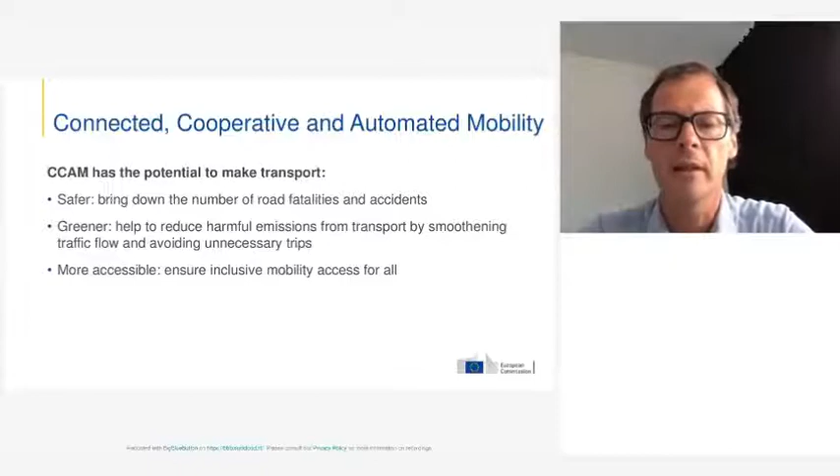At the European Commission, we have a comprehensive approach to support the development and deployment of connected and automated vehicles in Europe, where we think we need to develop a legal framework, take into consideration societal and ethical aspects, and invest in research and innovation. We do this because we think that CCAM - connected, cooperative and automated mobility - has the potential to make transport safer, greener and more accessible.

However, there are several challenges that need to be addressed, and they go beyond the key technologies, although that's a very important aspect. The right legal framework has to be set up and adopted at member state and EU level. Also, connected and automated vehicles will need to be integrated into the broader transport system and interact with other forms of mobility. In other words, we don't think a connected and automated vehicle is a silver bullet to solve all your mobility problems. Finally, acceptance and trust in this CCAM technology by users and society has to be nurtured every step of the way. Without this, you can have technology that works and a legal framework that allows it, but if people don't want to use it, you will not get the benefits.

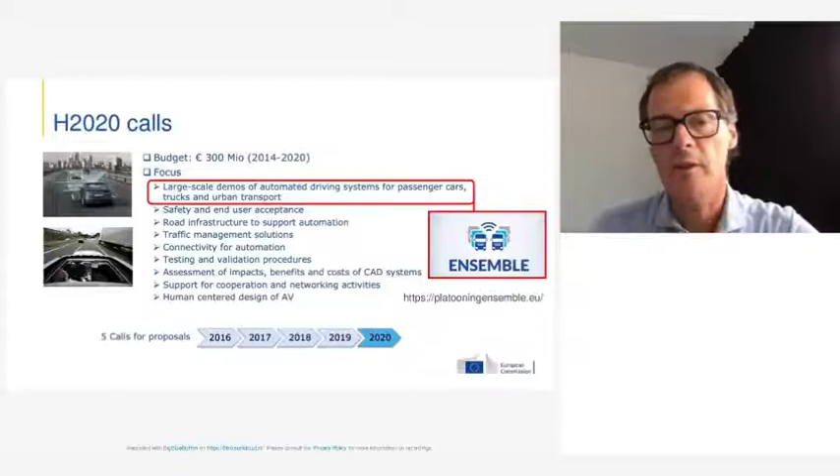As you may know, we are currently in the Horizon 2020 framework. It's a 7-year framework, and we funded a lot of calls. The budget is approximately 300 million euro, and we are now at the final stage.

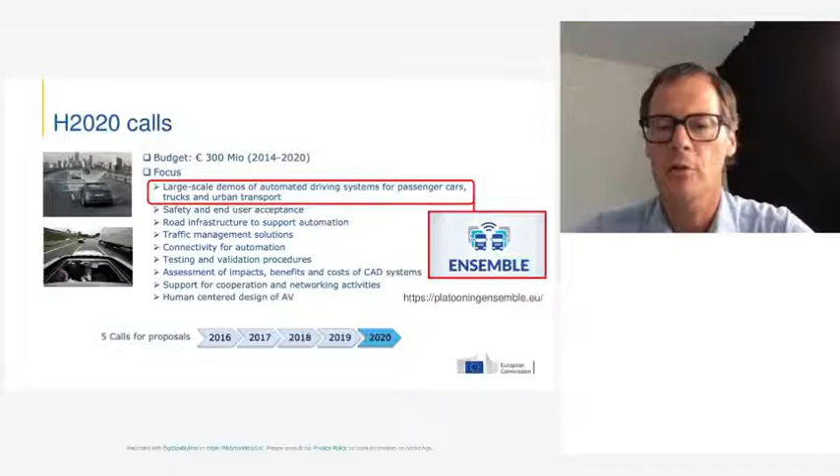We had to focus on quite a lot of different elements of CCAM. I put in red the large-scale demos of automated driving systems for passenger cars, trucks, and urban transport, as I think they are quite relevant to this webinar, and especially Ensemble, since it is about multi-brand platooning. You can find all the information about the ongoing Ensemble project at the URL below the symbol.

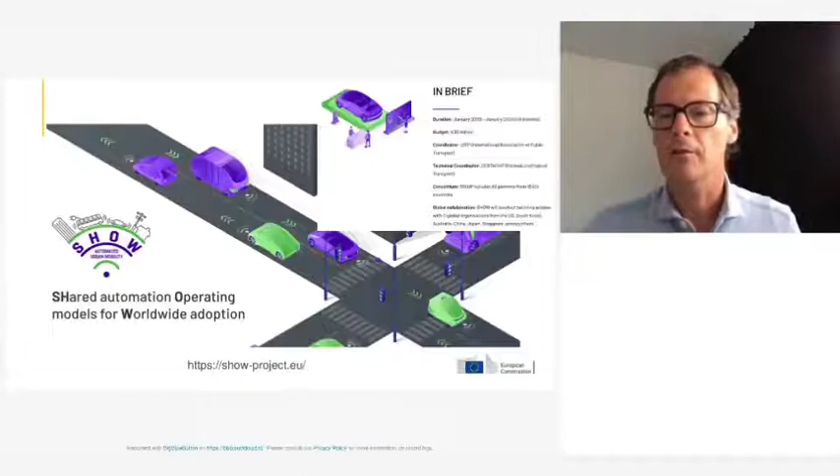Two of the latest projects that have just started are SHOW and HADRIAN. SHOW is about developing and testing shared, connected, and cooperative automated vehicle fleets in urban areas. So in a sense, that's also quite relevant to the STAD project. I think it's a quite large consortium with 69 partners, and international cooperation is foreseen. You can find all the information on this project at this URL, and it will last for the next 4 years.

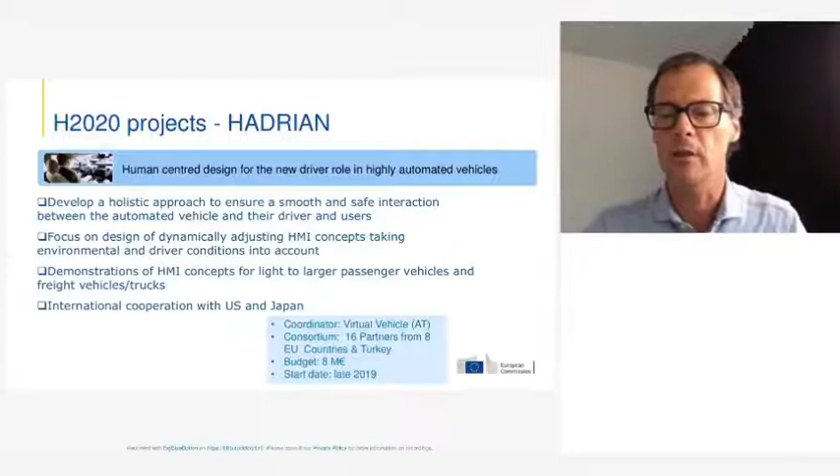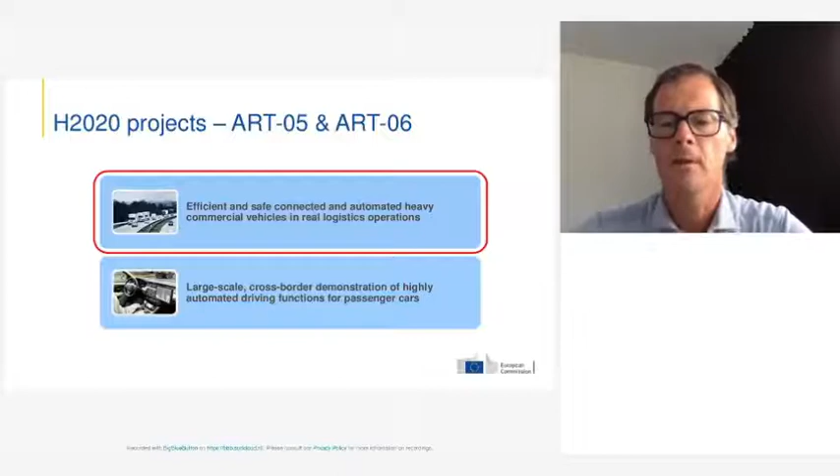I would also like to announce that the final 2 automated road transport projects in this framework are currently in the granting process. Sorry that I cannot announce them today, but one of them, ART-05, is on efficient and safe connected and automated heavy commercial vehicles in real logistics operations, and that includes truck platooning as well. So that's quite relevant for this webinar.

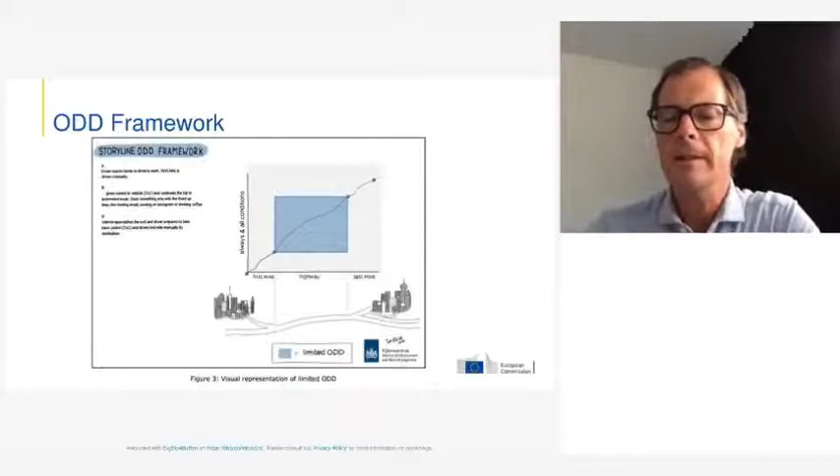Then a few words on the operational design domain framework. This is something that I did in my time with Rijkswaterstaat, where we try to envision the operational design domain. This is the area or the set of conditions under which automation is functioning. In theory, you can depict it like this, but in practice it's a bit more complicated because due to a lot of external factors that cannot always be controlled, the operational design domain will have some gaps.

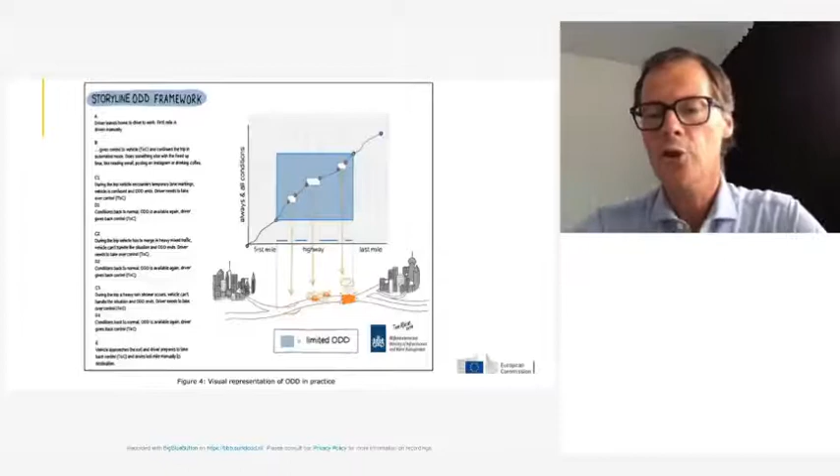This is usually because of infrastructural shortcomings or complications. It can be other traffic. It can also be adverse weather conditions. And I think that one of the joint tasks that we have with industry, policymakers, and academia is to try and optimize the area of the operational design domain.

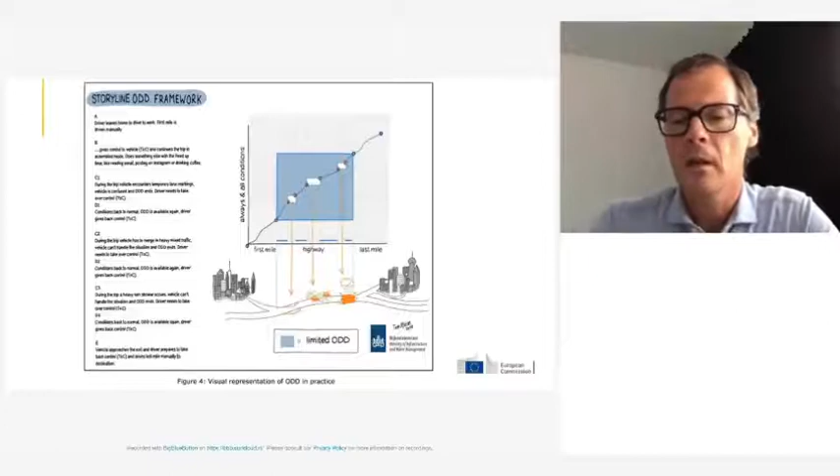In practice, what we try to do at the Commission is to position a lot of the projects so that they can deal with several of those challenges. As you can see here, there were a number of projects looking at the relationship between automated driving and infrastructure, such as Coexist, Transaid, Inframix, and Maven.

Here you can see that quite a lot of projects are related to one of the reasons for gaps appearing in the operational design domain. Of course, trying to control the weather is a bit more complicated. That is something we will have to deal with for a long time. On the left, I put several large-scale demonstrations.

L3 Pilot is basically dealing with passenger vehicles, Ensemble with freight vehicles, and Show with public transport solutions. We think that it's really important to try and find solutions based on actual practice. When you take your concepts to the roads, that's where you will see the complications, and you need to go back to the drawing board and try to improve and improve. So we think that this iterative process really is valuable.

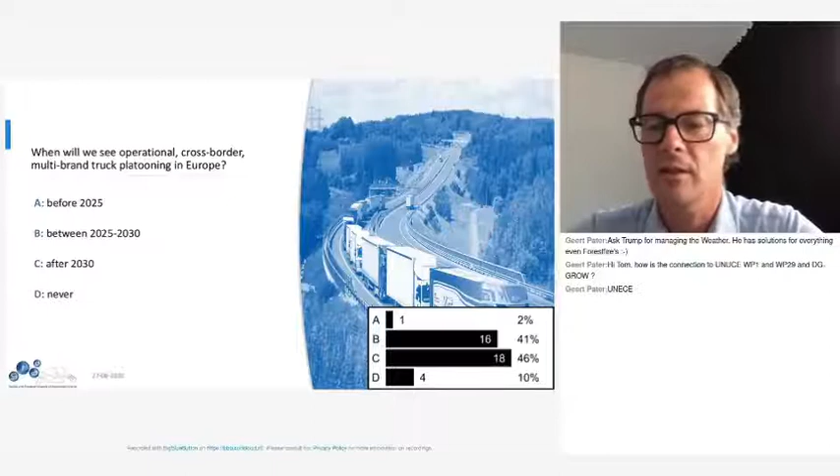I see that we have a lot of smart people in the audience, meaning that we are neither too optimistic or too negative. So most of the options are around B and C. I will publish them right here. Yeah, we may be quite optimistic because cross-border multi-brand platooning is not easy, but it would be good if we can see it within the next 5 to 10 years. Let's see. There's only one way to find out, and that's in practice.

Okay, now we go on with the program. I will introduce the other two speakers briefly.

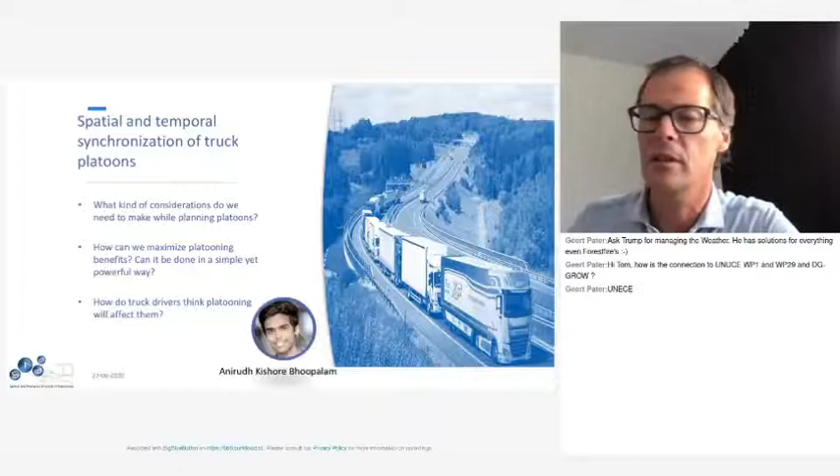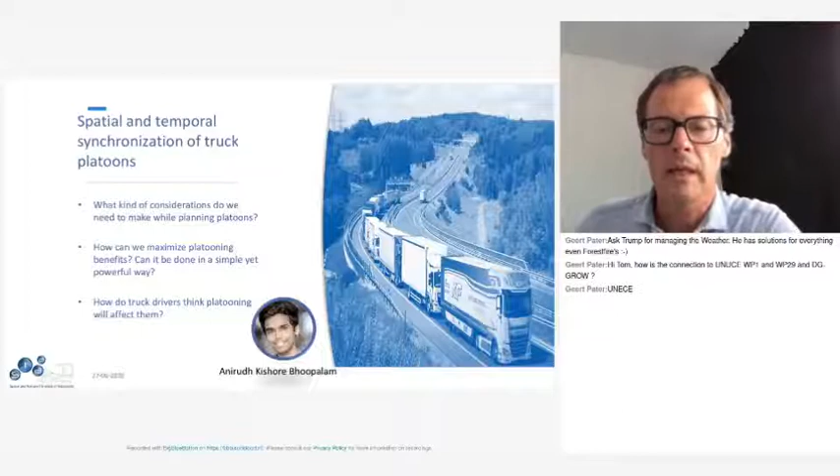The first speaker is Anirudh Kishore Bhoopalam, and he is a PhD candidate at the Rotterdam School of Management. His research interests lie in the application of operations research methods and quantitative models to transportation systems. He currently does this as part of his PhD in the context of truck platooning. He began his PhD just after finishing his master's in transport, infrastructure, and logistics at the TU Delft, where he became particularly interested in automated driving. His presentation will be on spatial and temporal synchronization of truck platoons, and some of the items he will explain are what kind of considerations do we need to make while planning platoons, how can we maximize platooning benefits, and can it be done in a simple yet powerful way, and how do truck drivers think platooning will affect them.

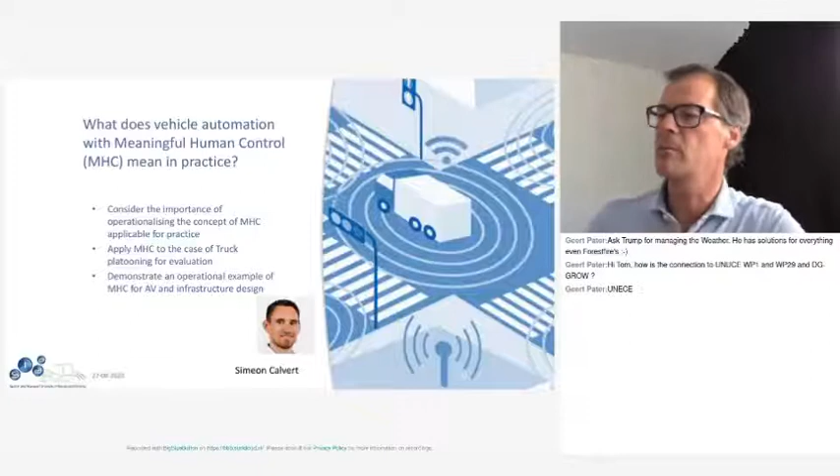The next speaker is Simeon Calvert. Simeon Calvert is an assistant professor in traffic and network management at Delft University of Technology. His main expertise lies in traffic flow modeling, traffic management, and impacts of automated driving and technology on traffic flow. He previously worked at the Research Institute TNO and has a broad experience in numerous European and national research projects. He also co-leads the Traffic Data Analytics and Simulation Lab in Delft, the DiTTlab, and the Delft AI Lab on urban traffic and mobility behavior with AI, the City AI Lab.

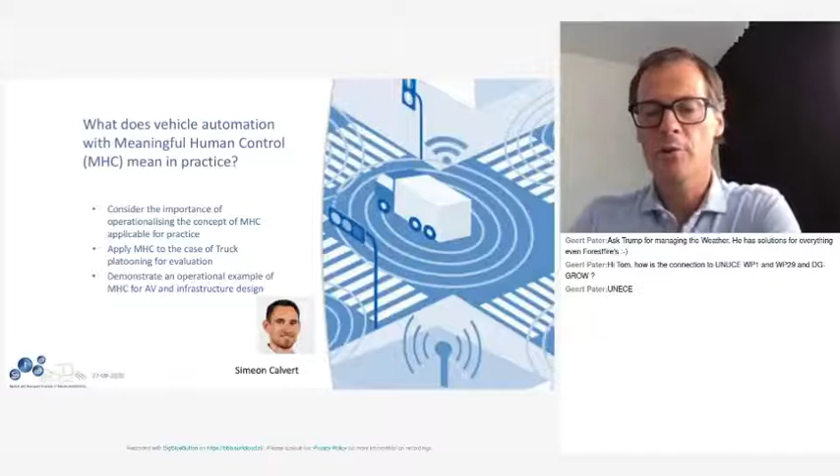So his presentation will be on what does vehicle automation with meaningful human control mean in practice. And he will consider the importance of operationalization of the concept in practice. He will talk about how they applied this to the case of truck platooning for evaluation and demonstrate an operational example of meaningful human control for automated vehicles and infrastructure design. Looking forward to hear a bit more about that.

And then there will be one more webinar on the 10th of September in which Pablo, Daniel, and Rian will present on behavior, so the behavioral aspects of automated driving. And this session will be moderated by Peter van der Knaap from the SWOV. Okay, I guess at this moment I hand over to the next presenter, and thank you for your attention so far. We will take questions after Anirudh's presentation. Thanks.

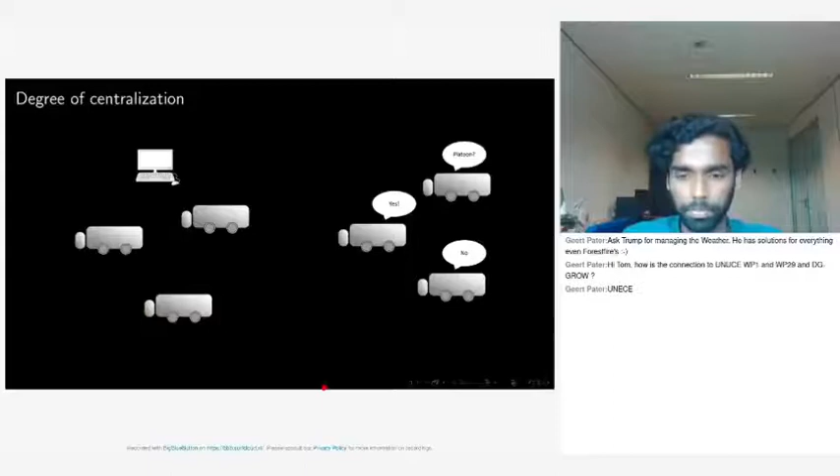The levels of automation also influence the nature of the planning problem. The first step in platooning is human-driven platooning, so you have drivers in all the trucks that are attentive at all times. They get assistance from the system, of course, but they have to, for example, be ready to leave the platoon and join in, and still do some steering and so on. The planning for this is basically the exact planning problem that I discussed.

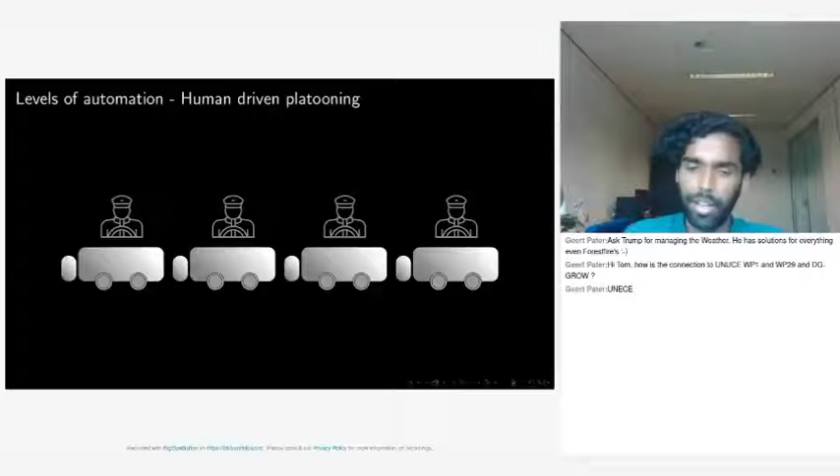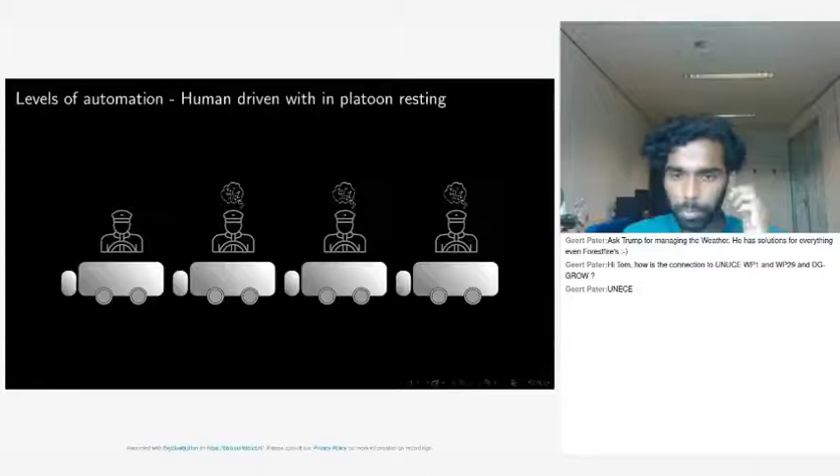The next form of platooning is human-driven platooning with in-platoon resting. In theory, the drivers in the following trucks can take breaks, so they don't have to physically stop according to regulations while taking breaks. There must obviously be some physical breaks where they have to stop, so trucks in theory can drive longer. This really influences the planning problem because you have to take these regulations into account, and they differ from country to country, continent to continent. So the problem would change in nature quite a bit depending on whether you're doing it, for example, in the EU or the US.

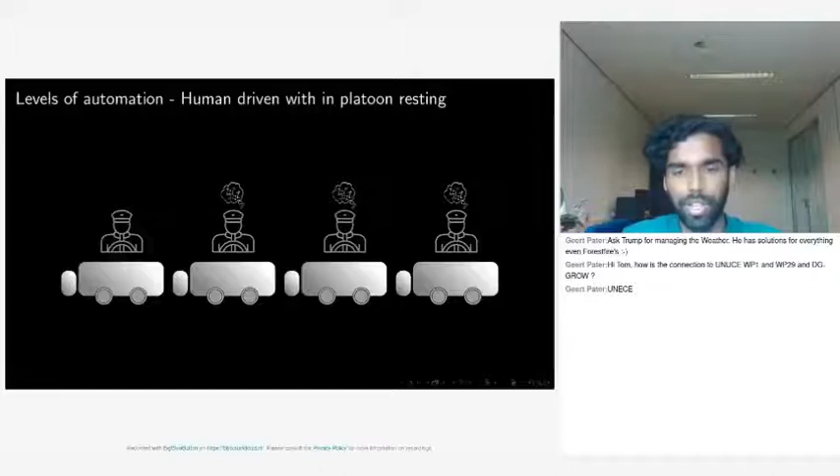You already see this with normal truck driver scheduling, different problems for different regions, and that will become even more complicated when you take platooning into account. The next step would be hybrid platooning, so the heading is messed up.

You have a driver in the lead truck of a platoon and no drivers in the following trucks. However, when a truck leaves the platoon, you still need a driver. So the biggest planning issue is how would you get that driver into the truck when it leaves the platoon. Would you have some sort of shuttles or taxis driving around transporting drivers between the split points and meeting points of platoons?

And that itself is a planning problem. How do you plan these trips? Or do you have some sort of physical hubs where drivers wait? So yeah, there's a lot to be considered here, and it's the first big, proper fundamental change in the way things work.

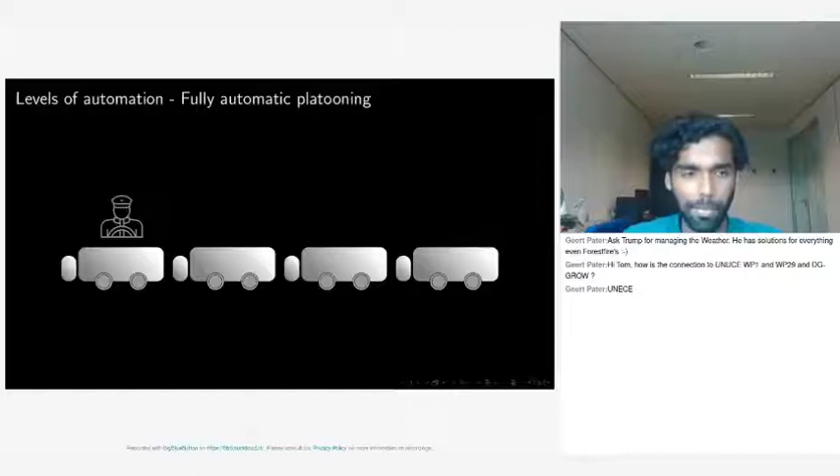Yeah, I switched the heading, sorry about that. So this should be fully automatic platooning where there are no drivers in any of the trucks. Planning-wise, this is actually not that difficult because if you think about it, it's the same as the first form of platooning where drivers are in all trucks, so you don't have to think about driver breaks or anything else.

It might be even more flexible because with drivers, you need trucks to return to depots so that they can go back home at least once in a while, depending on their contracts. But here you can have it really flexible, so trucks don't have to come back, they can just stay somewhere, and that opens up a lot more collaboration.

So I'll talk about a couple of conclusions that we had from this part of the research. I'll show the whole thing already. There's still a lot of room to work in when it comes to optimization. A lot of sophisticated meta-heuristics still haven't been applied to platoons.

Also, a lot of researchers consider the first form of platooning, and recently a study came out with break times included. But for the more automated platoons I just talked about, there's pretty much no research out there.

Also, all these planning methods don't really take uncertainty into account, like stochastic planning and the effects of congestion. There are, of course, studies that do this at a micro level, looking at how it affects congestion on a stretch of highway, for example, but not really on how this would affect the whole system and the entire system of trucks along the entire route.

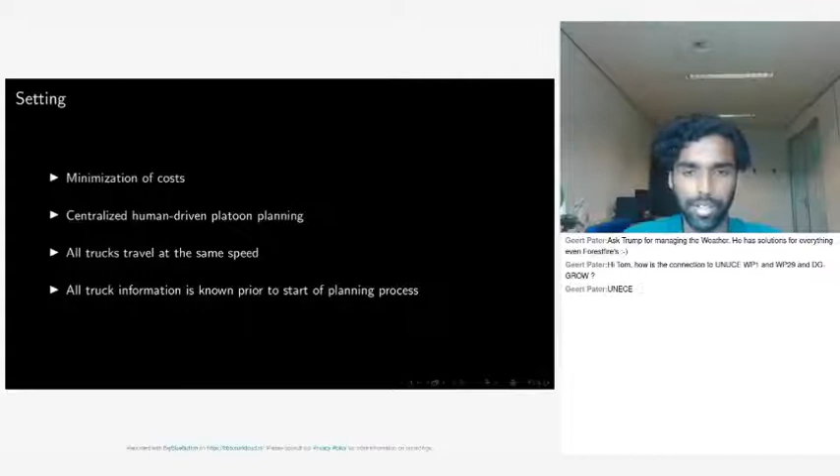So there are two problems that we look at here: the truck platooning problem and the truck pair routing problem.

On the other hand, the truck pair routing problem is much simpler, where you just have 2 trucks, and they can only be part of 1 platoon per trip. So you meet a truck, you split up with that truck, and you drive on to your destination.

And how do we solve this? For the big truck platooning problem, we come up with a 2-phased mixed integer program based on a time expanded network, and we can restrict the number of trucks in a single platoon. For example, we can say that each platoon can have only 3 trucks at max. So for the next one to join, one would have to leave earlier. We can make those kind of restrictions.

And the truck pair routing problem, we reduce it to the shortest path problem, which is very easy to solve. It has been studied for tens of years now. Then we can do that for all the pairs of trucks we have in the system, and find the optimal matching to be able to find a platoon partner for every truck in the system.

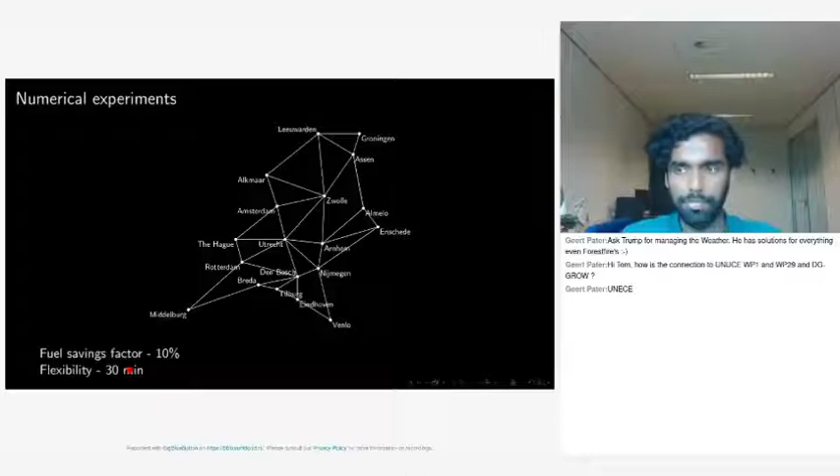So we do this by testing it on a network that represents the Netherlands, at least the highways in the Netherlands. And we assume that the fuel savings factor is 10%, which can be changed pretty easily since it's just a parameter. And each truck has a flexibility of 30 minutes. This means that they have 30 minutes to wait along their trip, or potentially take a longer route to be able to form a platoon with another truck, and they can still make their deadline. If they have to do something longer, then they wouldn't form a platoon, and that would be infeasible.

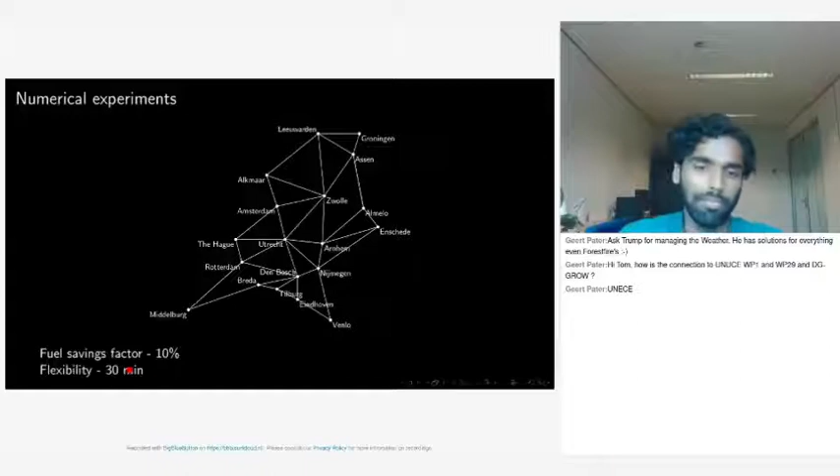So before I show you exactly how this compares to the truck platooning problem, just have a quick poll. What do you think the percentage cost difference is between when we optimally plan it this way compared to asking all trucks to take these simple platoons using these heuristics? What is the percentage gap? How much worse is B when compared to A? I can add that.

I can still see responses coming in. I think I will leave it on for a few more seconds, maybe 10, 15. I think I will publish the results. So yeah, most people think it's between 10 and 20%, something greater than 20. I think C is a clear winner, but otherwise it's a fairly even split. Well, at least for this study, the majority is not correct. So C wasn't really what we found, as you will see.

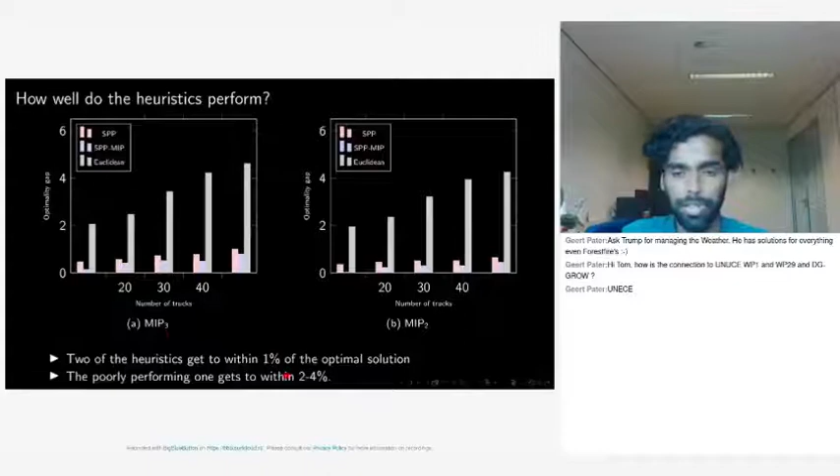So it seems to appear that these simple 2-truck platoons capture a lot of the benefits that these more complicated platooning arrangements have to offer. But what's the benefit of using these? We can see that they're much quicker. So how quick are they?

Furthermore, when you have more trucks in the system, finding the optimal solution would take longer. Obviously, the times don't scale up proportionally - it would just take a lot longer, and these heuristics can provide you an alternative to find near optimal solutions in much, much shorter times.

One thing we can see here is that simple 2-truck platoon arrangements, with 1 platoon per trip, provide a lot of the benefits of more complicated platoon arrangements. And simple 2-truck platoons are easier to coordinate and more robust in practice. What I mean is that you can make changes much more easily, because if there's a change in the plan of 1 truck, only 1 other truck is affected, its platoon partner. But in the other situation, if there's a change in the plan of 1 truck, then potentially multiple trucks can be affected, and it just propagates throughout the system. So it's much more robust in that way.

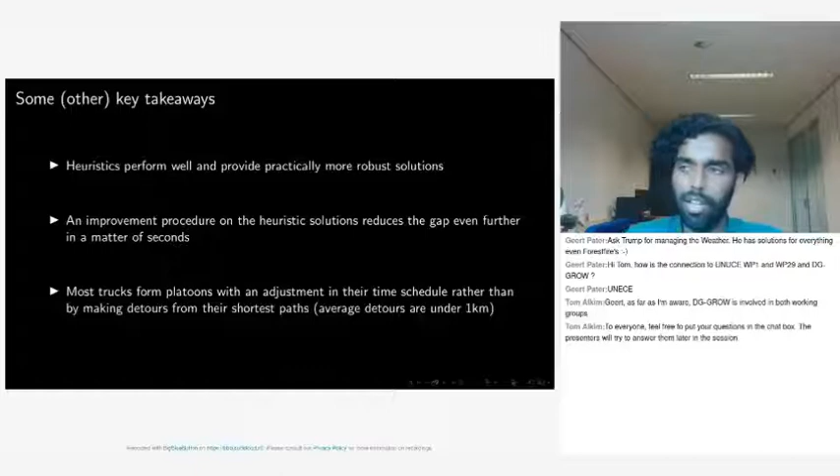So some other key takeaways from the study. The first was that they perform well and provide practically robust solutions. We also have an improvement procedure that I didn't show the results of, but it even reduced the gap even further in just a matter of seconds. One more interesting finding was that a lot of trucks form platoons with an adjustment in their time schedule. They really don't want to make detours because detours cost a lot in terms of extra fuel, which eats into the platoon savings. So average detours are under 1 kilometer. So by even potentially looking at it like a scheduling problem, you can save a lot of computation power and get a lot of the benefits out of it.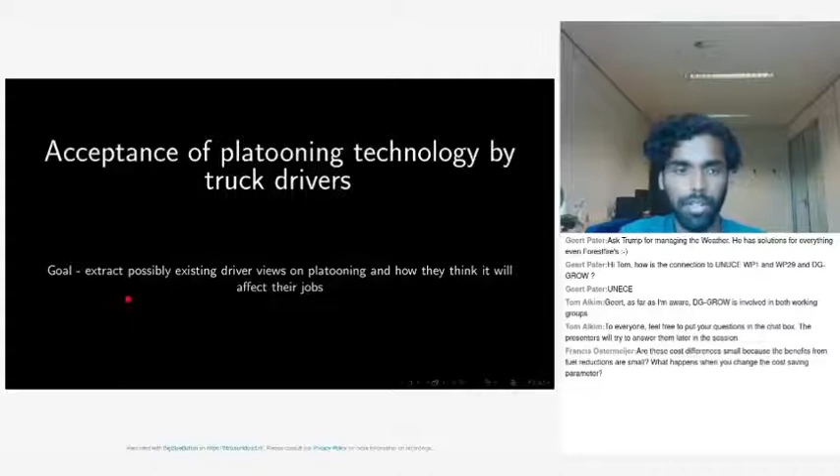Finally, this is the least developed part of the PhD for now, so I will do this a little quicker. We wanted to extract possibly existing different driver views on platooning and how they think it will affect their jobs. The main message: drivers are not very enthusiastic, which I don't think is very surprising.

I'll talk a little bit about the method because I found it quite interesting, especially the data collection process. We wanted to do focus groups, for which we visited different truck stops in the country, where truck drivers stop at night. It's basically something like going to these restaurants and asking drivers if they want to participate. And if they do, we just sit around the table and chat over a drink, basically, with structured questions, and get their feedback on how it's going, record everything with permission, and then analyze the data that we receive.

We structured this according to the different forms of platooning we had, so we asked them the same questions for each form of platooning. We had focus groups of between 4 and 7 people, and each session lasted an hour, but some lasted even longer. The language was in Dutch, I was the moderator, along with a colleague. Getting truck drivers to participate was a challenge, which again is understandable because we were people that showed up at 7 o'clock after a long day asking them to answer questions. I think some of them didn't really appreciate that, but ultimately we got what we wanted, I guess.

Some quotes that we had during this focus group study: truck driving is like a paid hobby, so a lot of them are really passionate about what they do. One even went as extreme as saying that if platooning became a reality, they would quit their job. Some of them think it can become a reality within 5 years, some people think it's 20. And this last quote was said by multiple people in different forms: that everyone needs to have this technology for us to see its benefits. Yeah, that makes sense even in terms of planning.

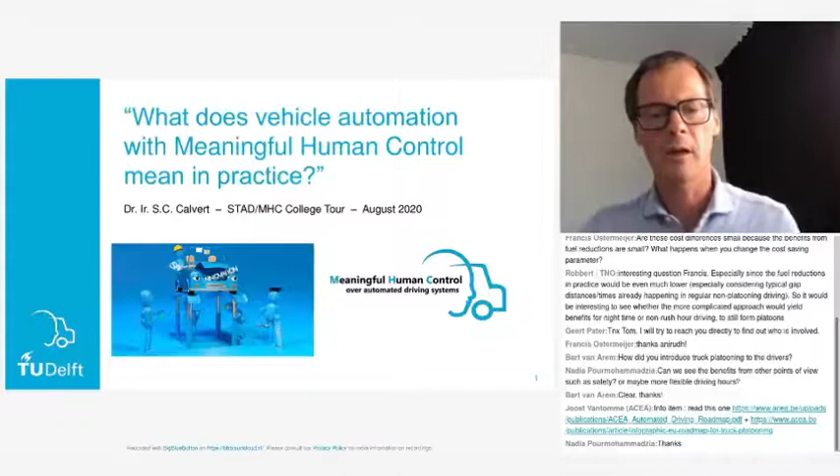Okay, thank you very much, Tom. So my name is Simeon Calvert. I'm an assistant professor at the Department of Transport and Planning at the TU Delft. And today I want to have a look at the concept of meaningful human control and how we can use that in practice for vehicle automation.

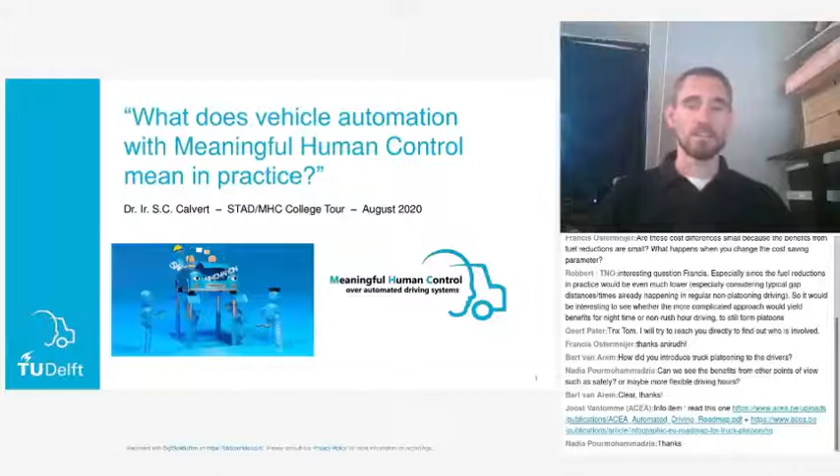Now, I'm not a pessimist, not by a long way - I actually count myself as an optimistic realist. I think, as being a realist, some of these headlines do highlight some of the difficulties that we have with automated driving. Now, in the last 10 to 20 years, but actually leading up to that, the last 50 to maybe 80 years, there's been a lot of development with vehicle automation.

And a lot of that has been especially focused on the technological challenges, and it still actually is to a large extent, especially with the OEMs, with the manufacturers. And at the same time, increasingly, we're understanding that we also have challenges in regard to maybe the more ethical or behavioral aspects of automated driving. And this has been known for a while, but it's only really started to get a lot of attention in the last 5 to 10 years. And especially in regard to vehicle design, it's not something which has quite caught up with the technological advances yet.

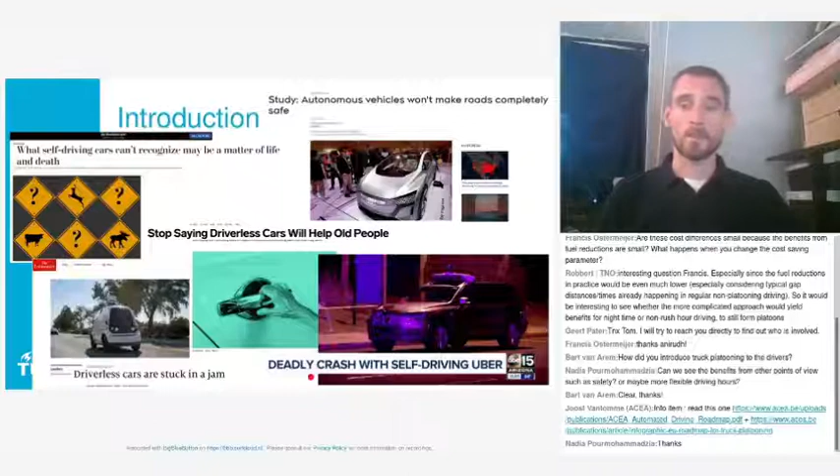So what I'm going to do first is just give a quick recap on what Meaningful Human Control is, because I don't think everybody was at all of the previous college tour presentations. And then I want to focus on why it's important to consider operationalization of this concept - I'll touch upon some of the core components, then look at a qualitative example of where we can apply it to truck platooning. And then after that, a more quantitative operational example that really shows what we can actually do with the concept when it's applied in practice for specific cases.

So we've taken this concept and translated it to automated driving. Basically, an autonomous vehicle is a robot, but we don't want this robot, this autonomous or automated vehicle, if it's a lower level, to perform tasks or do things that are not humanly acceptable. We want it to drive in a way that we desire, following our intentions. Part of the Meaningful Human Control project focused on the ethical side, another part on the behavioral and psychological side, and the third part on the more traffic and engineering side. My involvement was mainly on that last one, trying to work out how we can take this concept and actually apply it in practice.

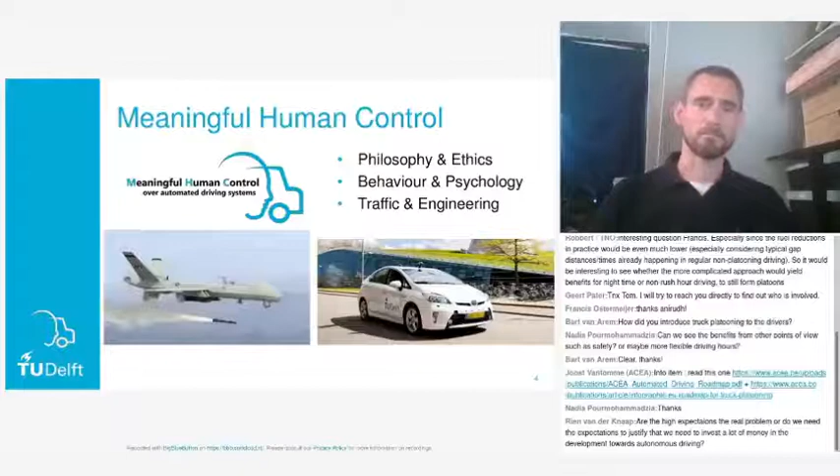So within Meaningful Human Control, we have two main conditions: the tracking and tracing conditions. The tracking condition is that each automated driving system should track, basically follow, the human reason of whoever is involved with that system. So a reason might be to perform their tasks safely—that could be one of the human intentions. It could be to perform certain routes or follow a certain route. These are human reasons that the system must be able to track.

At the same time, we have the tracing condition, which says that the automated driving system should always have some sort of human user that can be traced in the chain of control. So this means that if the vehicle performs a certain maneuver, it should be able to trace back to where that maneuver was either programmed or was a driver who influenced it—some sort of human actor. So these are the tracking and tracing conditions which are key to meaningful human control.

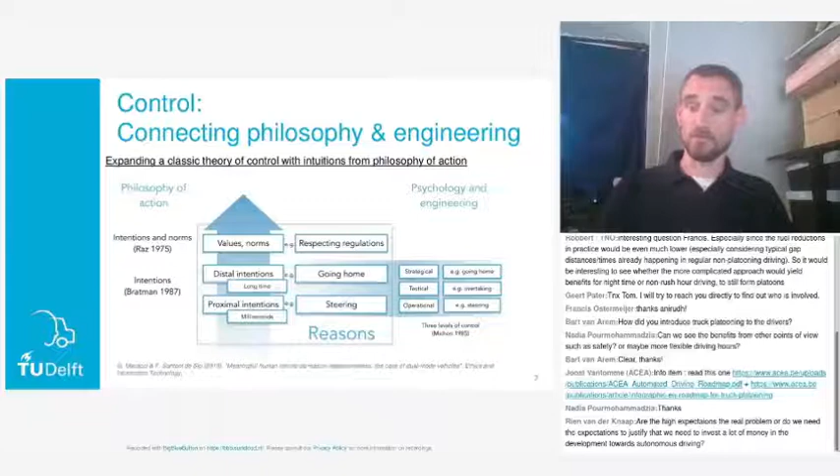So before we continue, I have a quick question. Again, using the polling options: how well do you think human ability and morals are currently considered in automated driving systems? You could do this for any automated driving system you may be familiar with—it could be adaptive cruise control, or the Teslas you see out on the roads. For whatever system you think of, how well do you think the morals and human ability are considered?

I'll give you 5 more seconds to answer this.

3, 2, 1. Okay, so we see that the majority of you actually think that many of the moral and human ability parts are not properly considered in the systems, let alone all of them. I think this also follows the line of thought we've found when looking at many systems—a lot of the technical challenges are addressed, but when it comes to the human and ethical parts, there's still some work to do.

So this is also why there's some challenges that the automotive industry needs to address. Some of the challenges come down to, if you have a concept like meaningful human control, it's very abstract. I hope you've managed to understand the 2 conditions I explained, but still it's a very abstract concept. It's not something you can easily stick in a piece of software or change under the hood of a vehicle. At the same time, it's bound to many ethical and behavioral interactions which are not straightforward. And I think it's collectively subjective to a certain extent, because if you consider norms and values, these are very subjective terms when you consider society as a whole.

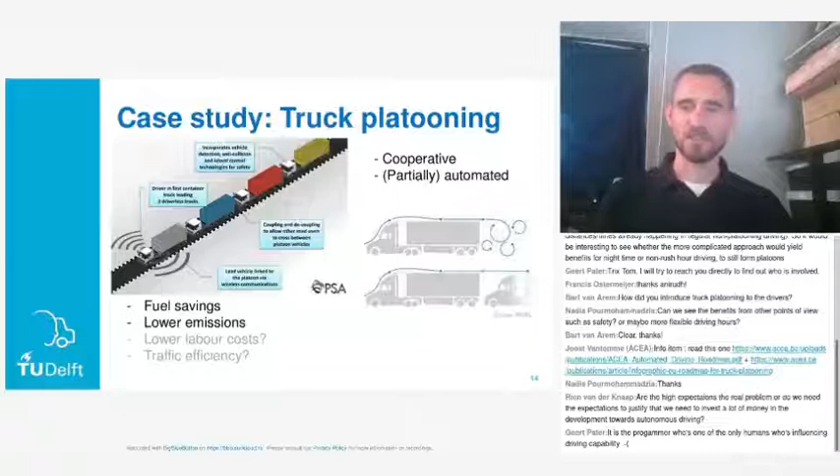I don't need to introduce truck platooning, because Anirudh already did quite a good job explaining what truck platooning was. But when we consider truck platooning control, looking at the operational control of a platoon, we have the front driver who is steering and controlling their pedals, but we also have the platooning system, which could be considered a CACC system - that's a cooperative adaptive cruise control system. The human control is basically with the front driver in that situation.

Now when we look at the operational control of the following trucks, we have the platooning system, which is there, and it depends on the type of system. But in many cases it certainly means the following truck has to monitor the system and maybe in some cases actually steer. But the human control of the whole platoon is still with the front driver, because the following drivers' trucks are basically still following the front truck.

So when we look at responsibility, on paper, we still see that the responsibility of a truck lies with an individual's own driver - this is in principle. Now I know this has been looked at, but still in practice and probably legally, this is still the case. So you see here that effective control is potentially confused when we look at who's in operational control against where the actual control is. I want to show this with a little example, which hopefully should make this much clearer.

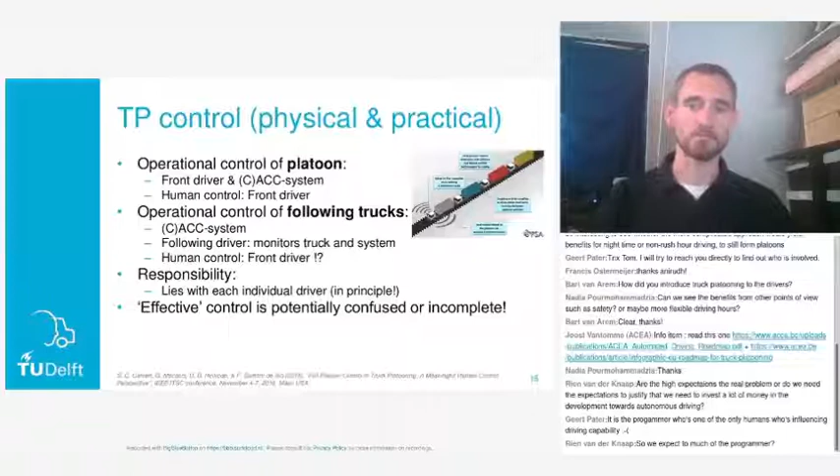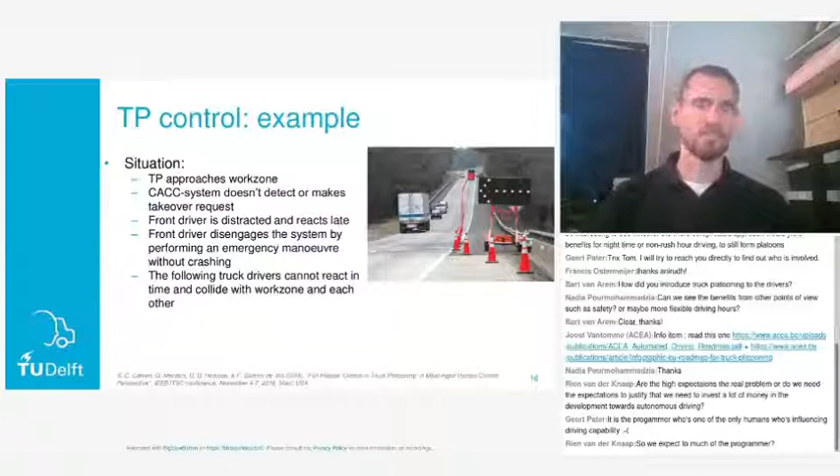So the situation is we have a truck platoon that approaches a work zone, something like the picture you see here. The truck platooning system does not detect the work zone and does not make a request to the driver. Now this is actually not completely unrealistic, because this has happened with some automated systems that could not detect a work zone properly. And the front driver was either distracted or thought the system could deal with this situation and reacted very late, but at the last moment did manage to steer away by performing an emergency steering maneuver without crashing into the work zone.

But because the following trucks could not follow that leading truck, since it was an emergency maneuver, and the trucks were not designed to perform this type of emergency maneuver when following because it might be unsafe, the trucks would then transfer control back to the drivers. But being so late in the process, the drivers only had a matter of seconds to react and couldn't, and the following trucks collided with the work zone.

So what we see here is a certain problem in that the following truck drivers could be held responsible, because there's a certain demand that says they must monitor their own trucks or monitor the system, and if need be, they have to react. In this case, it's maybe not reasonable to ask them to react in time because of either the short amount of time they have to react, or because distraction also might play a role.

You can imagine that if you have somebody monitoring a system for maybe a few hours in one go, they will get distracted. They won't be as attentive as they were when they started out.

So just analyzing this using tracking and tracing. The tracking condition is basically that the system responds to the human reasons. Now, technically, the system has responded to the generic reasons of the main driver, the front driver, because the platoon is en route and it is compliant within the way it has been designed.

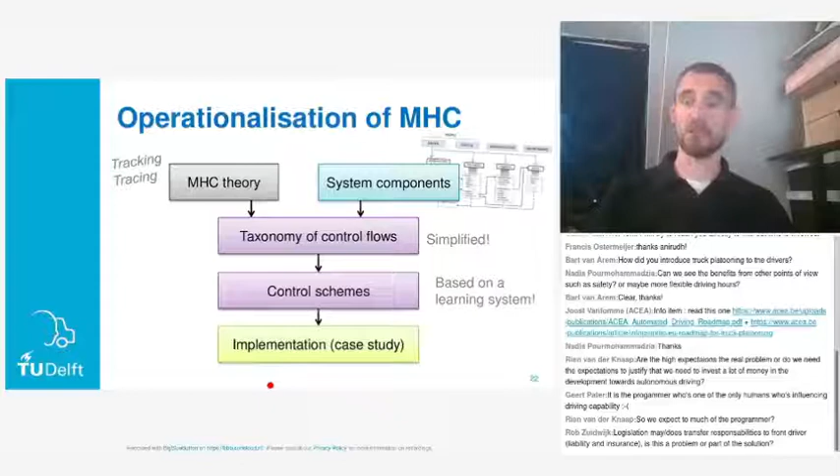So I have two of these slides. I won't go into this in too much detail, but this just gives a bit of this taxonomy, which shows how we've tried to connect various parts of these components.

So for example, the tracking condition, so that's basically the system should track human reasons, means that we have to have the human, so basically the agents. These could be either internal agents, so for example our driver, or they could be external, so that could maybe be a traffic controller, or society as a certain agent. And they can have their reasons, and as I showed, these could be values and norms, or they could be strategic, tactical, or operational.

But from that, behavior occurs, human behavior, and that could also be driving behavior. And these you can also attribute to some of these actors, so we can close the loop like this. Now behind this, we also have some mathematics that I'm not going to show you, but that describes basically how these things interact.

Now we can do the same for the tracing side, and I won't go through the whole of this, but just to give an example, the tracing side is looking at, is there a human agent in the chain of control? And part of this is also looking at the human ability. So, for example, ability is also subject to knowledge and capacity. So, for example, has somebody had training, it could be formal training like driving lessons, or it could be more informal training.

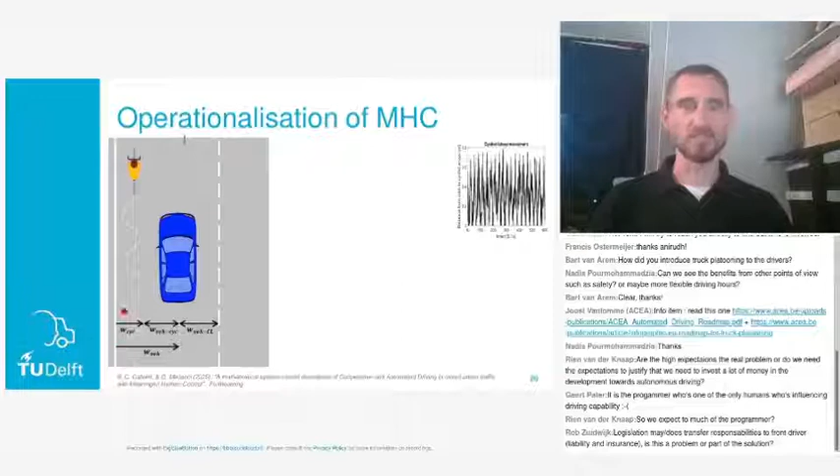And we've done this looking and focusing on two specific reasons, just to keep things simple, because it's already complicated enough. So these two reasons were, the first one was duration - so a human reason could be, I want to get from A to B within a reasonable time, so not take too long. That's the first one. The second one is safety.

So obviously you want to get from A to B safely, but you can find actually that these two reasons can be in conflict. If you try and get somewhere fast, it might be unsafe. And if you try and be safe, well, you might not even leave point A, or it might take quite a long time if you're looking for optimal safety. So there's a balance there.

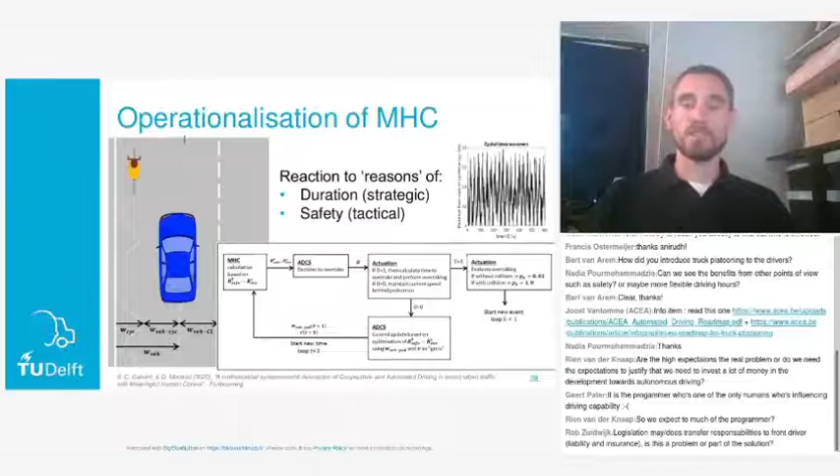We've put this into some of the mathematics that was behind the taxonomy, and I'm not going to explain this control scheme, but I'm just showing you that there is a sort of control scheme, and this is a simplified representation of it. And we did this experiment 200 times in the computer, so there were 200 attempts of the vehicle to pass the cyclist.

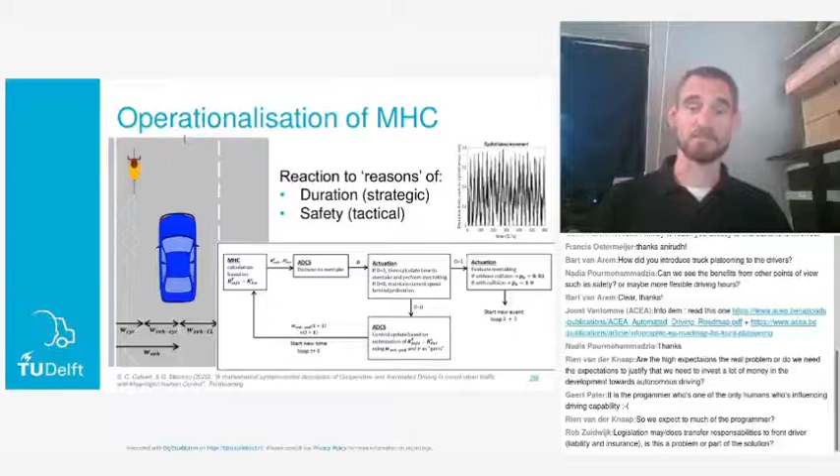Now I should point out it couldn't get too far away from the cyclist, because then it would also have a critical situation with oncoming traffic on the other side of the road. So there's also a boundary there.

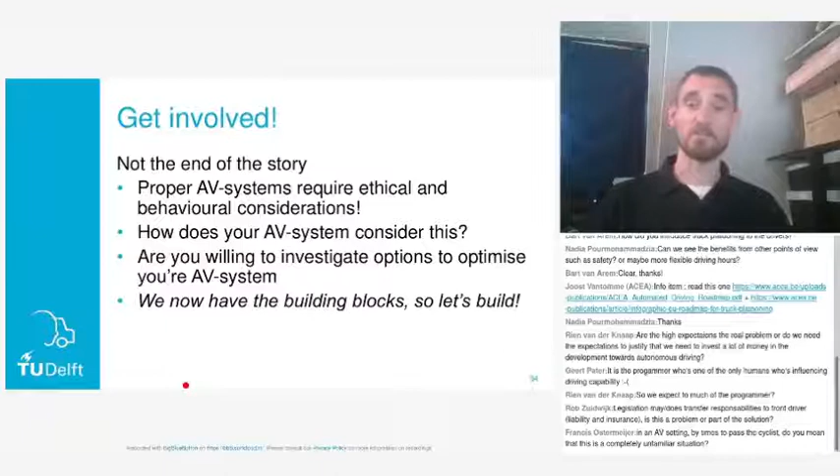Are you willing to investigate options to maybe look at meaningful human control in your own system? So what I'm basically saying now is we have the building blocks, and we're open to collaborating with either new or existing partners to see how we can start to apply these more and more in practice. So with that, I am done with the presentation and I'm willing to take questions, and I'm also curious to see what you've put in the chat box.